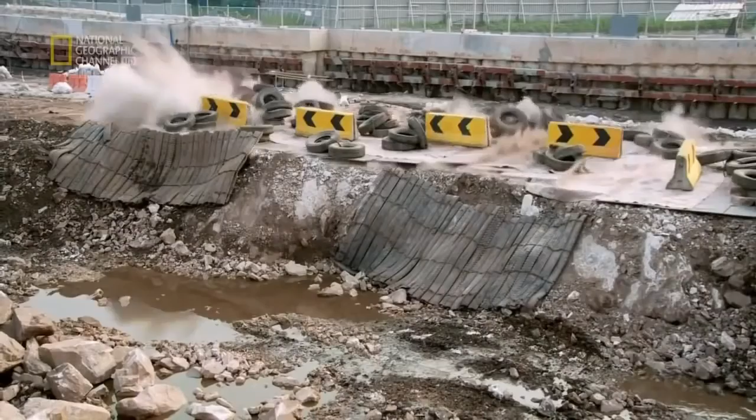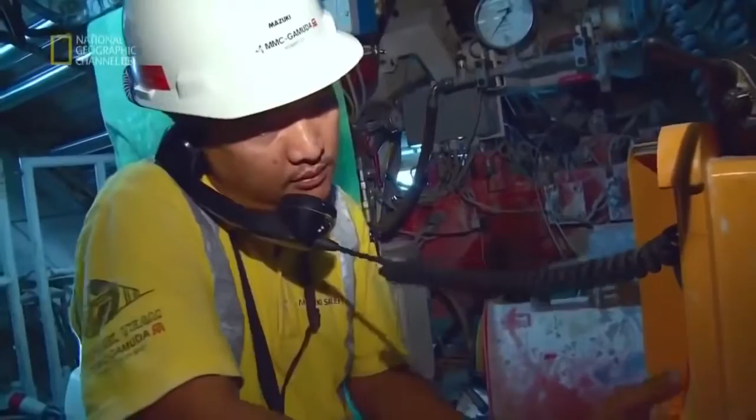Now there's an ambitious solution: a new transit system that will crisscross not only the city, but the entire region of Greater Kuala Lumpur. Huge machines will bore into Kuala Lumpur's treacherous bedrock to carve out almost 10 kilometers of tunnel. Every day of construction, the engineers confront the perils of mechanical failure, fire, and collapse. Get it wrong and billions of dollars of investment could go to waste, and the streets of Kuala Lumpur and its pent-up economy will stay trapped in gridlock.

Kuala Lumpur is one of Asia's most vibrant cities. It's looking to compete with the region's Asian tiger economies. Its magnificent skyline testifies to its soaring ambition. But at street level, it's a different story. The city is blighted by severe congestion that threatens its future growth.

Over 7 million people live and work in the Kuala Lumpur region, the Klang Valley. Every day, they head into town in 4 million cars. As an alternative, a light rail transit system was built. But over time, it has been overwhelmed, and connections are inadequate.

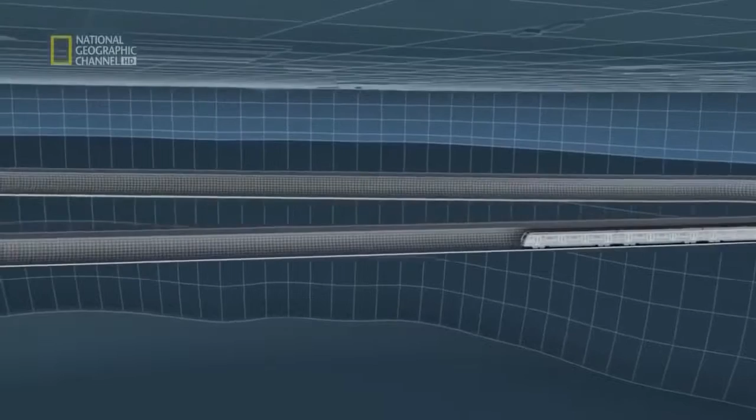Now there's a solution, a new mass rapid transit system that will reduce the pressure on traffic and unite far-flung parts of the city. For any modern metropolis to be vibrant, to be competitive, to be on par with some of the leading cities in the world, you've got to have a modern public transport system.

The Klang Valley Mass Rapid Transit System, the KVMRT, is Kuala Lumpur's bid for greatness. 3 different routes comprising more than 150 kilometers of brand new lines. It will be seamless travel around the Klang Valley, especially the areas of high concentration population.

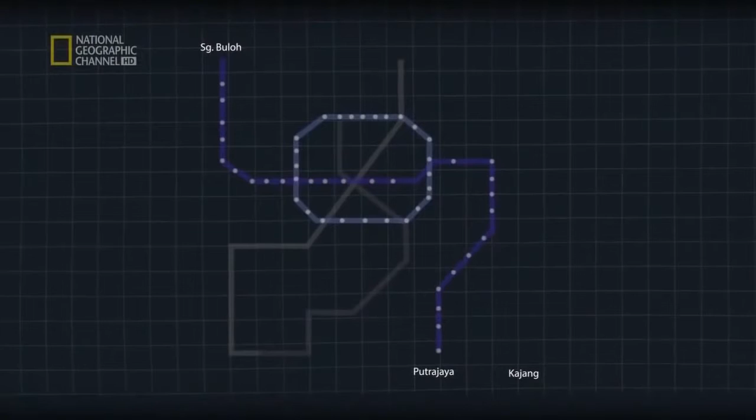And the first stage of the plan is the biggest test of all. This is the Sungai Buloh Kajang line. It will stretch 51 kilometers with 31 new stations. And a fifth of the new line will have to be constructed underground. To do this, 10 giant tunnel boring machines, or TBMs, will be brought to Kuala Lumpur and set to work.

These mighty engines do much more than burrow through rock, astonishing though that process is. As the huge drill crunches forward, the back end constructs the tough tunnel frame with high-strength concrete. In charge of this massive operation is engineering veteran Satpal Bogal. Most cities now, for railway mass transit systems, the tunnels are built using TBMs because of safety issues and because of ground conditions.

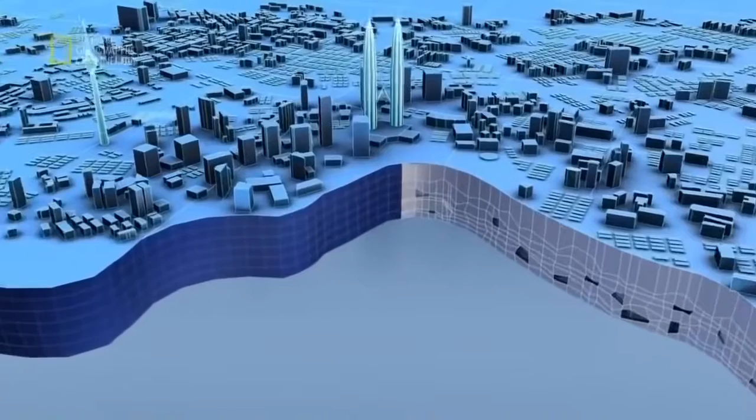The underground section of the new MRT will be a perilous undertaking. For beneath Kuala Lumpur is a formidable engineering challenge. Below the city are 2 very different kinds of rock, and the TBMs will have to deal with both. The western area is known as Kenny Hill, and the eastern areas as the Kuala Lumpur limestone. Imagine the difference between a Dutch Edam and a Swiss cheese riddled with holes.

Dr. Ooi Lean Hock is the project geologist and expert on Kuala Lumpur's underground world. I got this Dutch Edam cheese here. As you can see, this whole piece of cheese is fairly homogeneous, very tight. And Kenny Hill, when it's bedded, it looks something like this. This is like the KL limestone. All right, this is Swiss cheese. As you can see, there are a lot of cavities and voids inside the cheese. These voids can be transmitted all the way to the other side of the cheese. Things can move in from one hole to another hole, and it may come in vertically and go out laterally.

The most formidable challenge lies beneath the eastern areas of Kuala Lumpur, which rest on a huge slab of limestone. Over millions of years, torrents of acidic rainwater have eaten away the layers of rock to sculpt a hidden landscape of pinnacles, cavities, interconnected passageways, and colossal caves.

Around me here on my left is a surface karst or a limestone hill, you can say. Now imagine when we are underground and all these are covered with soil, it is totally a different ball game. So when you tunnel through this kind of material, there are a lot of unforeseen circumstances which would be a nightmare for tunneling.

This is the worst nightmare of all: the drill head hits weak cavities and the rock caves in on the cutter head. The solution is this stuff, slurry. At the head of the drill is a high-pressure chamber that injects a liquid called bentonite slurry into the cavities before they can collapse.

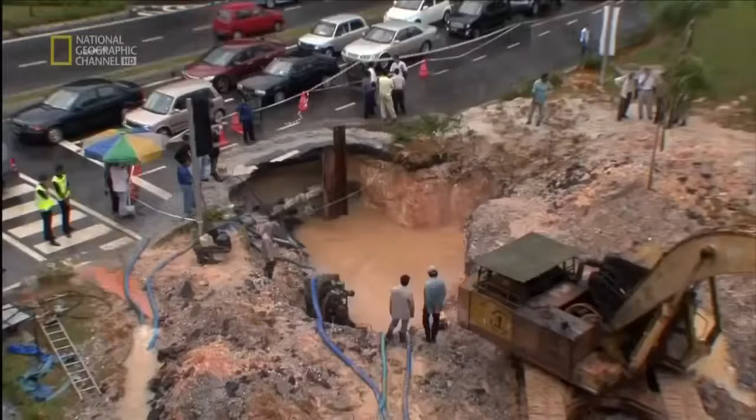This ingenious system was used by the engineers who built the Smart Tunnel in Kuala Lumpur, the world's first combined storm and traffic tunnel. But builders learned some hard lessons about slurry.

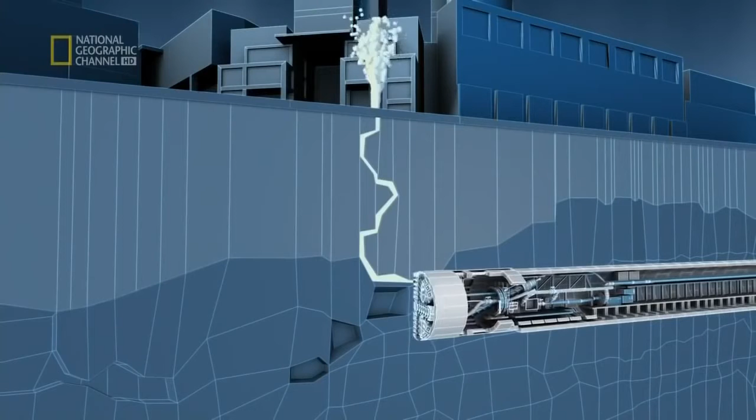Ng Hawei was a rookie engineer on this project. We have the best machines in the world in the SMART project, but we still do have some problems. We just couldn't control the slurry and it easily escapes to the surface, creating sinkholes. What Ng and the engineering team found, to their cost, was that the slurry they injected into the limestone cavities could escape into surrounding rocks and cause havoc, bursting from the ground like a geyser or creating sinkholes at the surface that might suck in people, cars, or buildings.

Today, Ng heads the tunnel team building Kuala Lumpur's MRT system. And this time, he had to find a solution to the uncontrollable slurry problem. Working with German company Herrenknecht, Ng and the team of engineers have come up with a revolutionary kind of machine. We throw in all the ideas, we have brainstorming sessions, we consult a lot of experts, we have to do a lot of research because no machine has been designed like this before.

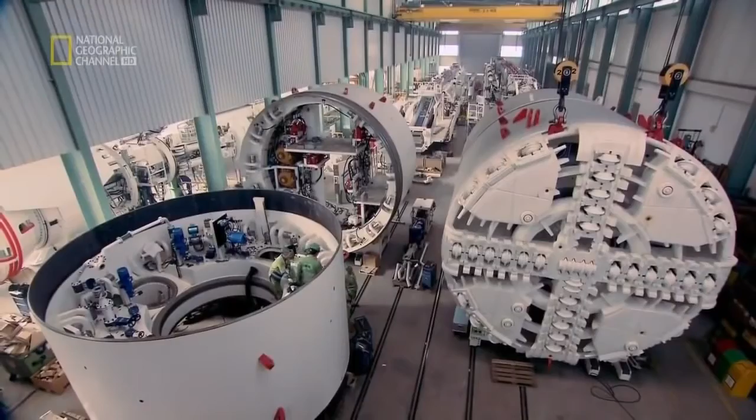From these brainstorming sessions was born this mighty machine. Called the Variable Density Machine, it's the state-of-the-art tunneler. For the first time, a TBM can control the consistency of the slurry and take on whatever Kuala Lumpur's underground throws at it. Even the construction of this revolutionary machine is on an epic scale.

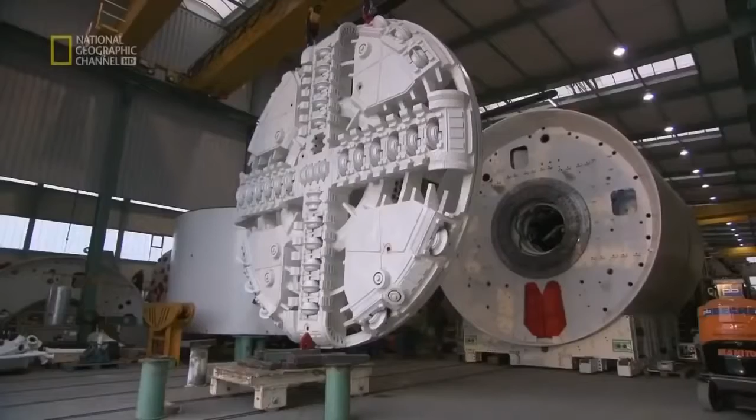Components are brought from all over Europe to be assembled inside the massive factory in Schwanau in Germany and other Herrenknecht plants in China. One machine like this is fiddled together. You can say the machine is fiddled together with about 40,000 pieces one by one.

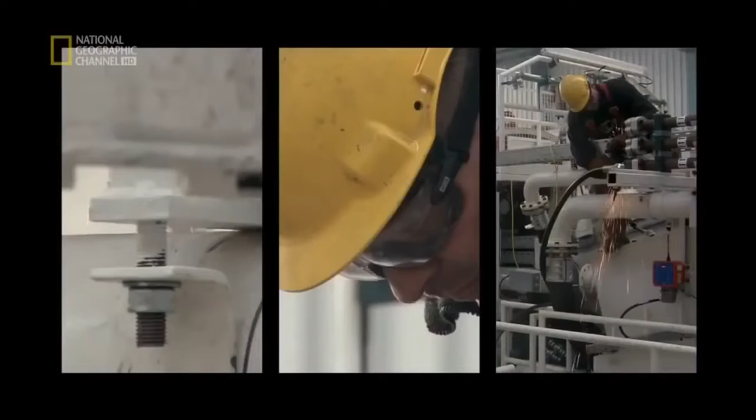The design starts screw by screw, piece by piece, and this is brought together with all our 400 engineers. They do all these works to come to this level, what you can see today. It takes 9 months to manufacture the revolutionary TBM.

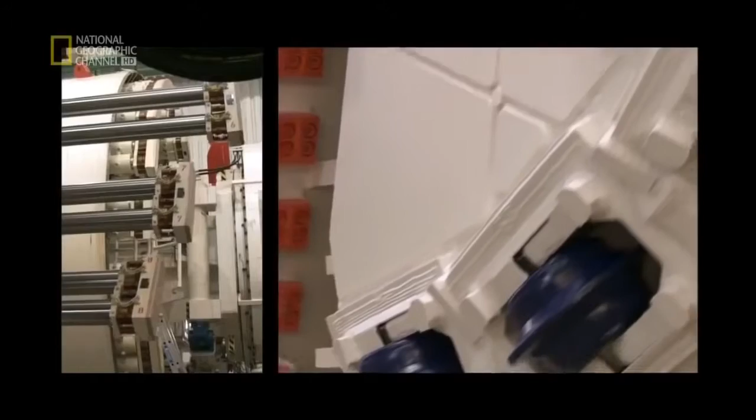Today, it's ready to be put through its paces. We have only seen it on the drawing board so far. So this is the first time that it is all put together. Everything is running, so we can check every equipment, including the cutter heads, the hydraulics, the safety features. This is the last chance for us to make final modifications before we send it to the site and put it in the ground.

As the engineers work on the TBMs in Germany, work gets underway in Kuala Lumpur. The engineering company in charge of tunneling, MMC-Gamuda KVMRT, must complete the job in 24 months and with minimum disruption to the city above.

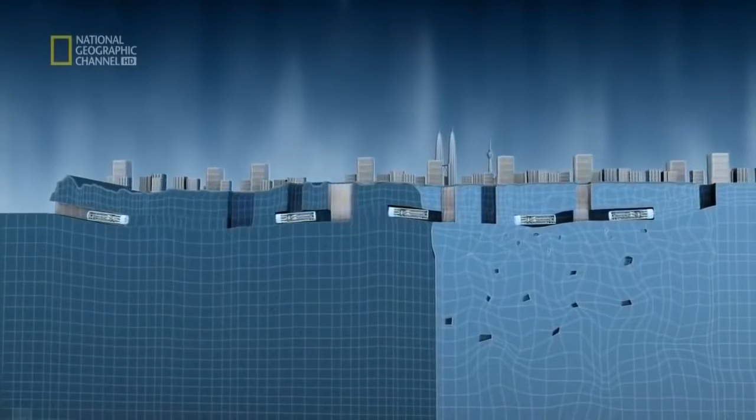The operation is conceived on a military scale and with military precision. The TBMs will be launched from 4 different staging zones along the planned route of the underground section of the MRT. At the western end of the tunnel, the elevated section of the MRT begins its descent underground from the surface. But at the 3 other zones, shafts must be excavated so that the different TBMs can be put to work beneath the city. Eventually, the different sections of the 9.5-kilometer tunnel must all link together.

Since July 2011, work on Kuala Lumpur's new MRT starts here at the Cochrane site. It must be dug out to a depth of 30 meters before 4 TBMs can be deployed. The huge staging zones will be blasted out of the ground.

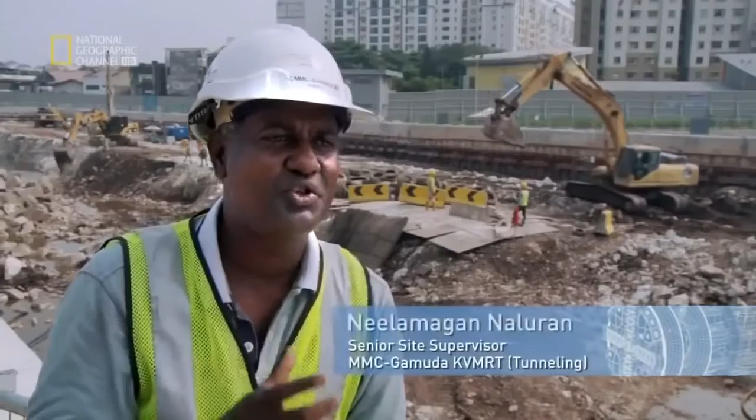We have short time to meet our requirements, so we are working with frequent blasts, more than 2 or 3 blasts a day. The blasting must be carried out with rigorous precision, especially in a city as dense as Kuala Lumpur. So when you talk of blasting itself, it's dangerous. You can see we've been surrounded by high-rise buildings. Now at the moment you're using about 150 to 200 kg. So that can bring a 10-story building down.

The solution is to sequence each blast, creating a pressure wave that, in theory, won't damage surrounding buildings.

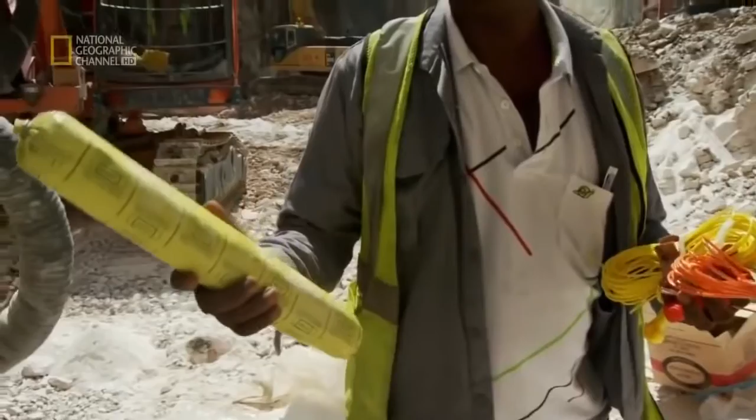These are the basic things we use. In my hand now is explosive, which will be charged to the detonators over here, and it will be connected one at a time, and finally we have relays. This will segregate the blasting rather than at one go.

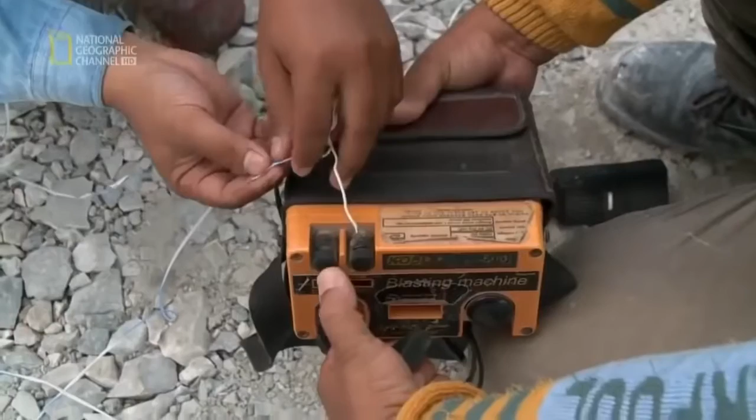Engineers dig rows of holes between 3 to 6 meters deep. Then the explosive charge is inserted inside with a detonator. These are connected to a central command point. But nothing is left to chance. Giant barriers of steel plates, truck tires, and concrete prevent debris flying from the site. The charge is set.

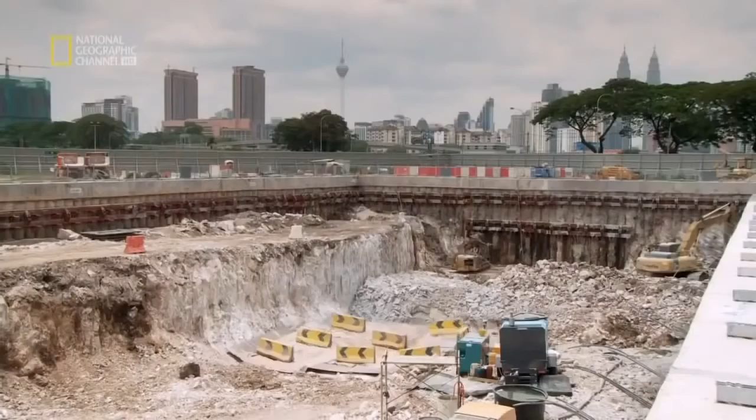The engineers have got the right formula, and the surrounding buildings are safe. The blasting continues at the Cochrane site for 7 explosive months. Enough rock and soil to fill 50 Olympic-sized swimming pools is blown out of the ground. And finally, the site is ready to receive the first TBM.

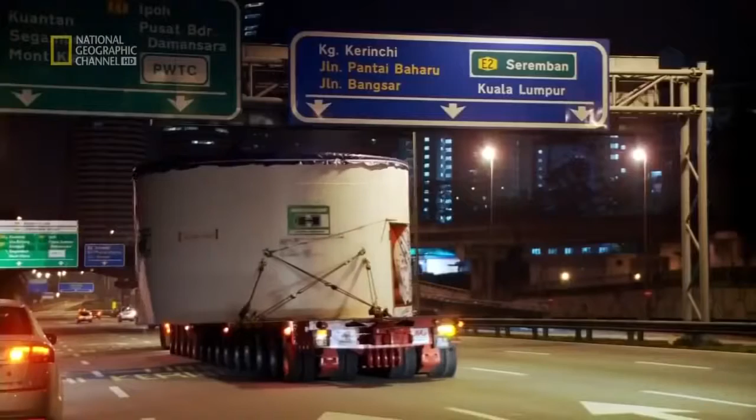Its code name, 774. At the beginning of 2013, the first new model arrives in Kuala Lumpur. The giant machine is transported in parts to the Cochrane site on huge lorries.

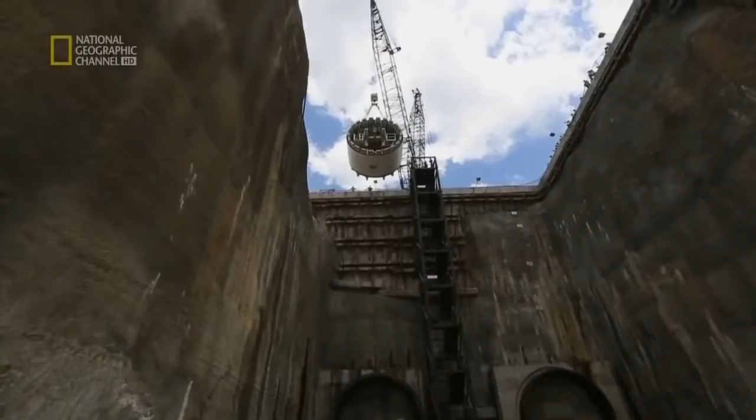But that's the simple part. Now the 160-ton monster must be lowered into the excavated shaft so that they can start chewing into bedrock. To lift it down 30 meters down the shaft, we have to be very careful. Anything can go wrong and then we are stuck. It will push back the whole project completion by a lot.

At the site, everyone is holding their breath as the TBM begins its descent underground.

Malaysia's capital, Kuala Lumpur, is being transformed into a huge building site. A new MRT system is under construction. Close to 10 kilometers will be built beneath the city, and a revolutionary new tunnel boring machine, or TBM, is brought from Germany. The first to be sent into action weighs 160 tons and has to be delicately lowered 30 meters to the tunnel entrance.

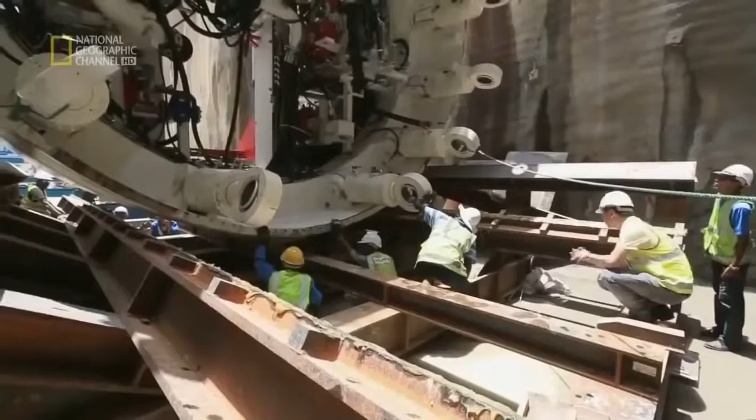The man in charge of the tunnel operation is Ng Hao Wei. He won his spurs building Kuala Lumpur's famous smart tunnel. We are dealing with very delicate components. We cannot afford to damage it. If the extent of damage is huge, then the impact to the project will be tremendous.

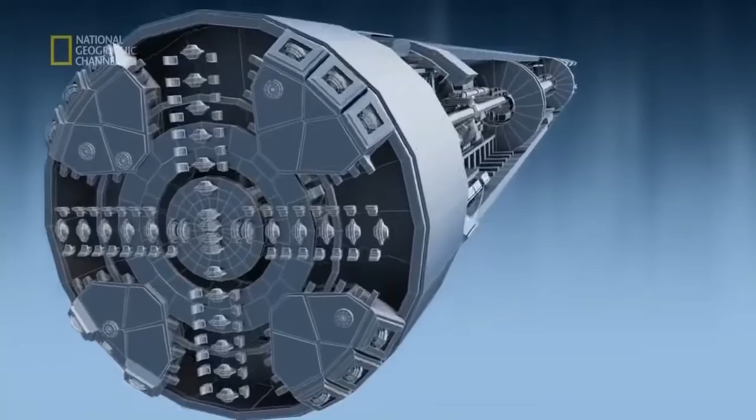This is literally the cutting edge, the business end of the huge machine. The circular cutter head weighs 70 tons with 37 tungsten carbide cutting discs, which are stiffer than steel and denser than titanium. The entire TBM is 135 meters long, almost double the length of a 747 jet airliner.

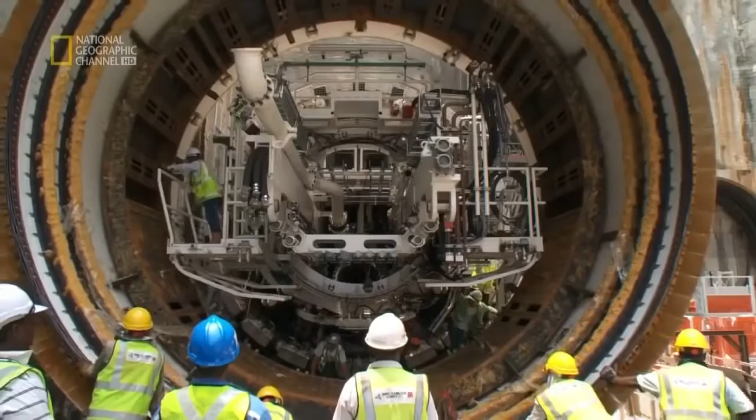Each TBM has 10 interconnected gantries to support the operation. Only 3/4 of the shaft has so far been excavated, so the monster machine has to be assembled in sections. We assemble up to the 6th gantry, which will give us the key components of hydraulics and electrics, so we can start to launch the machine. At the same time, give sufficient space for the shaft excavation to go on. It takes just under 3 months for the TBM to be assembled.

The Prime Minister of Malaysia launches the very first variable density TBM. It's actually a technological marvel. And it goes to show that, in partnership with a German company, Malaysians can offer a lot of our technical guidance and advice. This is something that we can be really proud of.

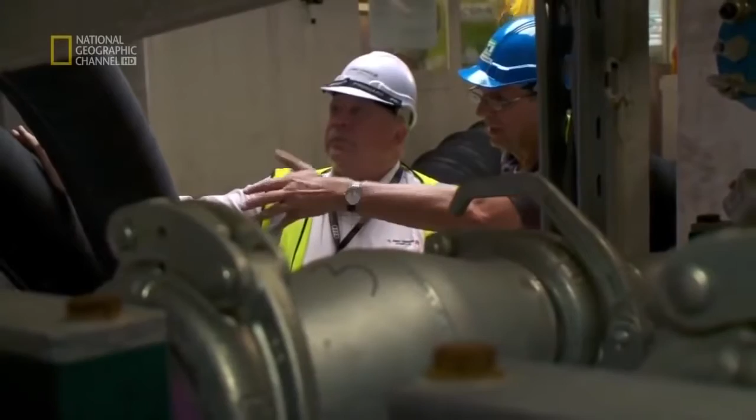One day later, Ng Hao Wei and his mentor Gustav Klados arrive to check on the machine's progress. Gus, a veteran Hungarian tunneler, has worked on some of the biggest tunneling projects in the world, including the Channel Tunnel linking Britain and France, and the Smart Tunnel here in Kuala Lumpur. This tunnel warrior is the team's project manager and is thrilled to be working back in the city on the new machine. It's uncharted territory.

We are trying out something totally new. A lot of people at the beginning said, no, it won't work, but now it is excavating. You can hear the stones moving around in the pipe, so it's a fantastic noise. It's my favorite. Much better than in the office.

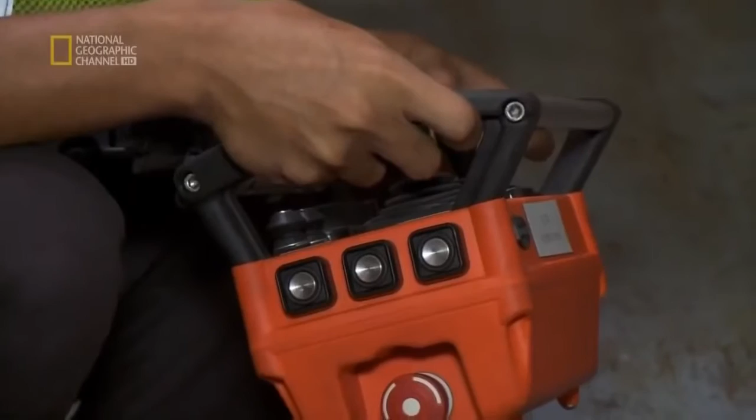It's not just the machines that will need breaking in. The giant TBMs must be served by an army of workers, day and night, week after week, month after month.

I'm new here, but I try to make my best every day. Everybody starts as new. Trust me. Me too, I did start as a new guy. My first job was to go and count the number of nails and bolts and nuts in the stores, and I went there and literally counted them for a week. When I finished, I went to the storekeeper and he told me that we usually use a scale.

The MRT tunneling project will need thousands of workers over the 2-year period of construction, and MMC Gamuda set up an academy to train the hundreds of workers needed to finish the tunnel on time.

Veteran or newcomer, the team faces a daily avalanche of problems, and right now, the problem is pretty basic. The TBM is just not picking up speed. 8 millimeters a minute. Not very fast. Yeah, but it's all right.

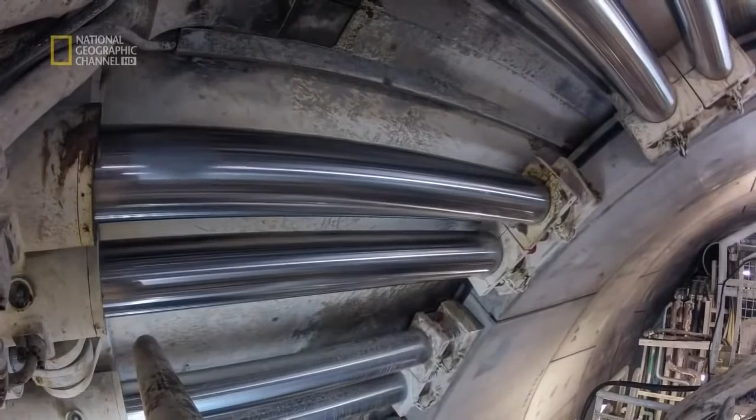At this pace of tunneling, the project will take 4 years longer than expected and run millions of dollars over budget.

But veteran engineer Gus Klados hopes that the giant machine will soon pick up speed. In the next few months, it is just to sort of break in the machine like a horse which has never been ridden before, and I am convinced that we will make it work.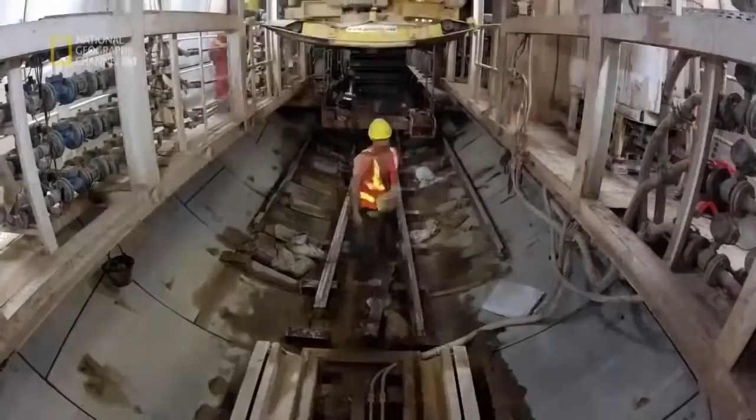The team is under pressure to complete the tunneling works on time. In the tunnels, the TBMs never stop mining, it's a 24-hour operation. And 3 weeks since mining began, the giant machine has at last picked up speed.

The TBM is like a huge underground factory, drilling, building, and spewing out waste. The heart of the entire operation is in this tiny space.

So what's happening? Pressure sensor number 4 has a broken wire. The control cabin is the heart, the control center of the TBM, where everything is controlled.

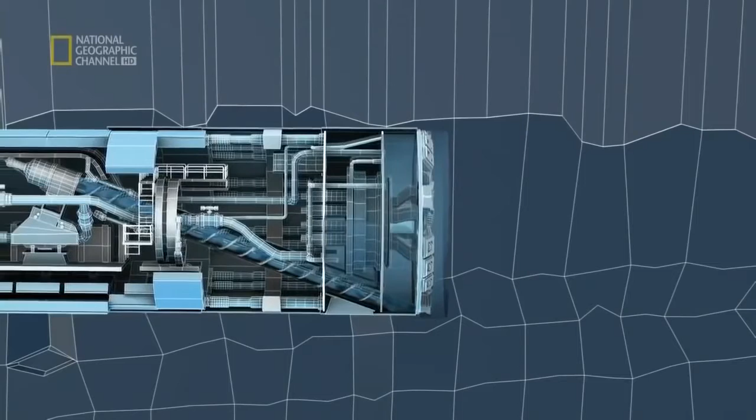If you're building a skyscraper, visibility is not normally a problem, but underground, it's a different story. You can't see through rock. So to give the TBM underground eyes, the machine is equipped with arrays of sophisticated sensors. It's like when you are working in a submarine, you have to depend on the sensors, you have to depend on communications, you have to depend on eyes. Other than yourself, you can't see anything.

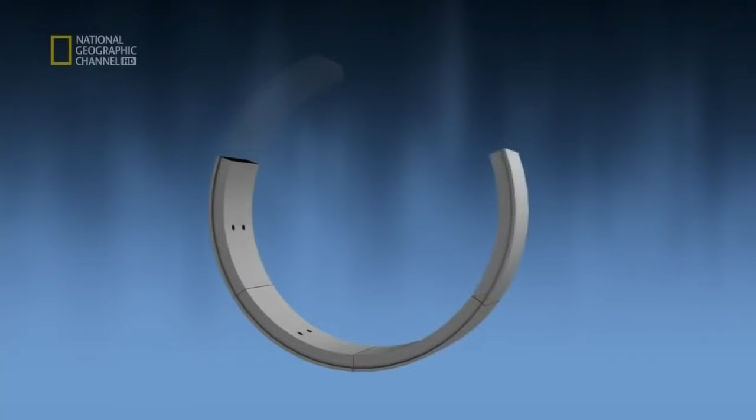Inside the control cabin, engineers can work out with absolute precision the real-time position of the TBM, calculate changes of direction, and when to start lining the tunnel wall. After mining about 1.4 meters, we build the segments piece by piece and build them up like a jigsaw puzzle. These tunnel rings are made from 7 segments plus 1 keystone that holds everything together.

The concrete wall segments can withstand extreme pressure 30 meters underground. All day long, concrete segments arrive at the TBM, each weighing 2.2 metric tons. Giant hydraulic arms swing the segments into place using the TBM's vacuum erector, which uses the power of suction to raise and position each segment.

Precision is essential. If any one of these segments are wrongly positioned, the consequences would be catastrophic. So it's very important to drum into the ring building team that they have to build it to the required tolerance of a few millimeters precision. If we are out of tolerance, water will find its way to seep through and we'll have a great problem to seal it up.

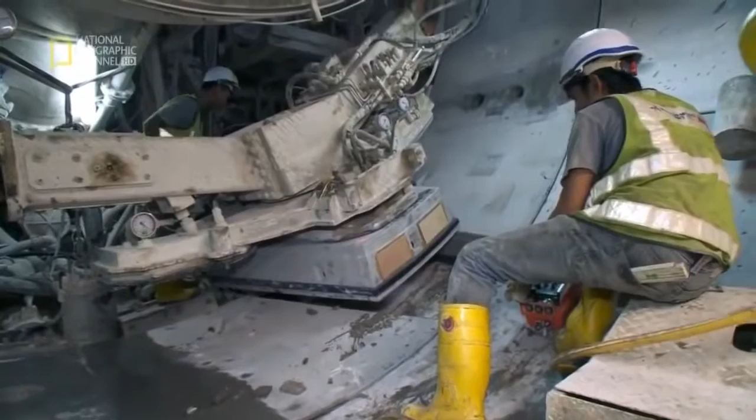Over time, as graduates of the Tunnel Training Academy get more experience, the process builds up momentum. In the first week, the teams managed to place just 3 rings a day. 3 months in, and the rate is 5 times higher.

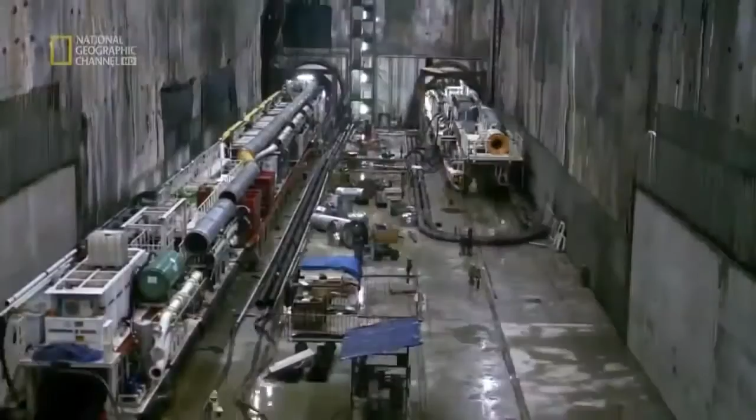The campaign to excavate Kuala Lumpur's new MRT tunnels is about to enter a more intense phase. By November 2013, 4 TBMs have been successfully launched from the Cochrane site. But at another launch site near Inai Road, the engineers have run into difficulties.

Here, 2 circular shafts are being excavated to 30 and 45 meters in depth. But as the shafts are blasted out of the ground, disaster strikes.

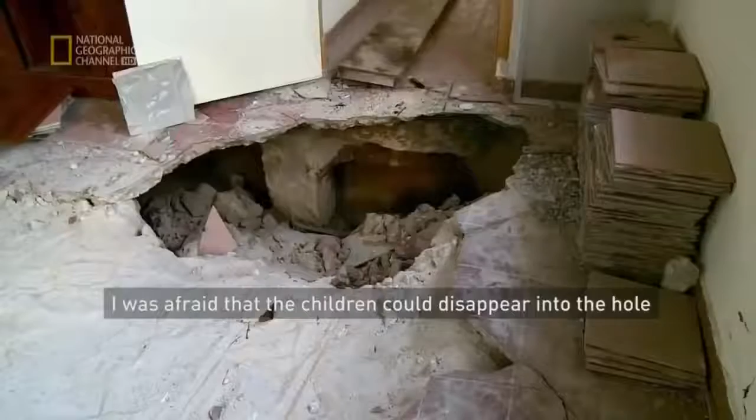In the heart of Kuala Lumpur, the new MRT project has hit a snag, a hole-shaped snag.

Mr. Jamaluddin lives 50 meters from the launch site on Inai Road, where 2 shafts are being blown out of the rock.

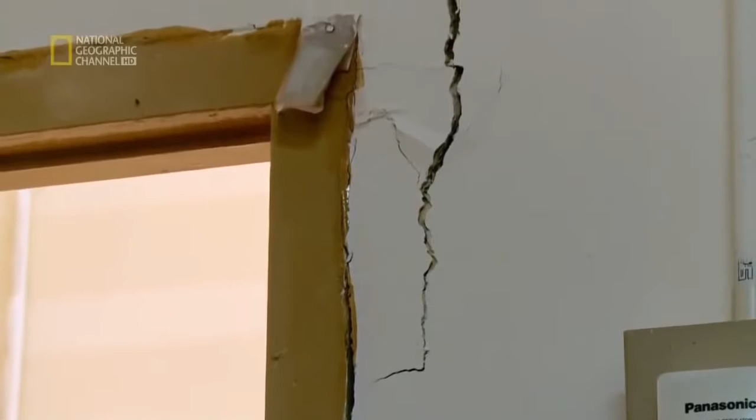Terrified, Mr. Jamal calls the company in charge of the MRT project. When inspectors see the condition of his home, they make an immediate decision to move the family out. Engineers now need to explain what has gone wrong and whether other homes are at risk.

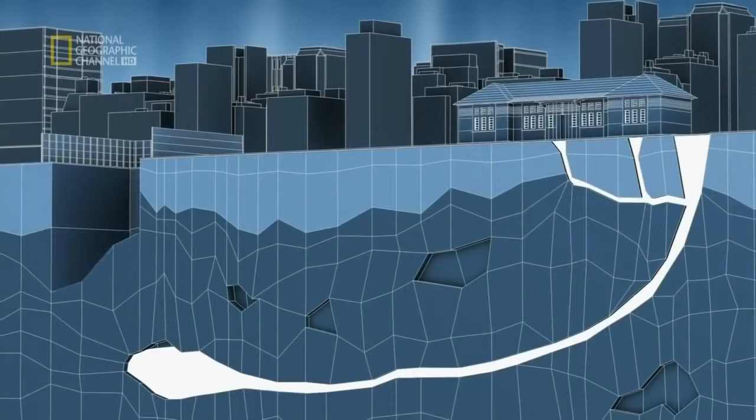In limestone, what happened is that the solution features can be connected laterally and vertically. What happened is we drill a shaft, and this hits a connection. When there's a hole, it's like a pipe culvert. If you have a culvert connecting from the shaft to underneath Mr. Jamal's house, that forms a very easy flow passage of water, bringing the soil from underneath Jamal's house into the shaft. And that results in sinkholes.

And it's not only Mr. Jamal's house that's in danger. Water is pouring in from the walls in the deeper of the 2 Inai shafts.

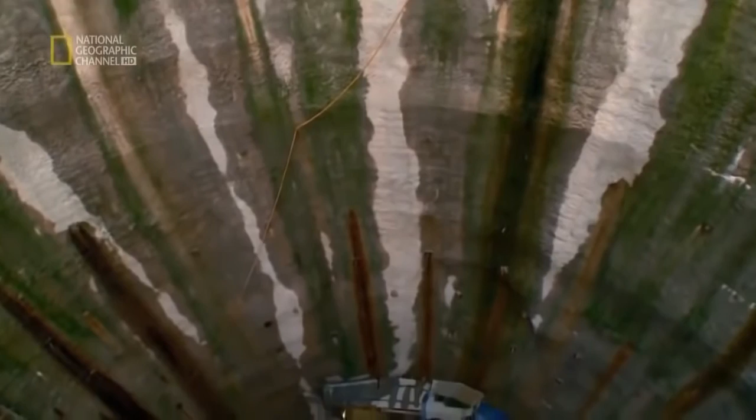It's unstoppable, and the situation is a tough call for project director Satpal Bogal. We couldn't stem it, and the decision was taken to backfill it for safety. That decision then followed on to other changes to the program.

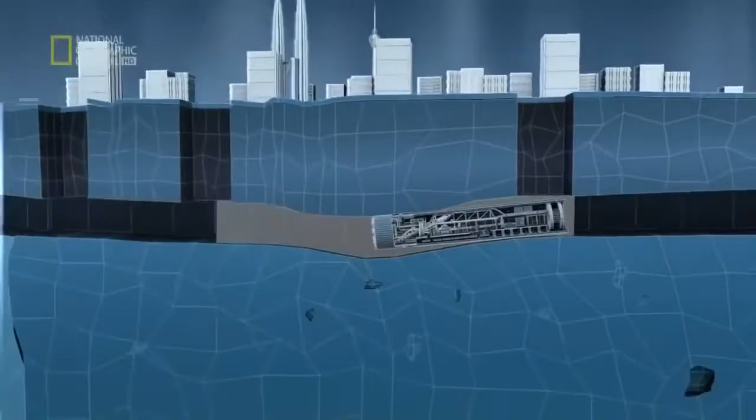Abandoning one of the two Inai shafts is a huge setback. Now only one TBM can be launched from here, meaning a new strategy has to be devised. The first TBM brought to Malaysia, 774, which has been mining from the Cochrane site, must now make up the difference and tunnel more than twice the distance. It will put the complex machine under severe strain.

It's not only flooding that makes the Inai launch site such a headache for the engineers, it's also a very tight fit compared to the other launch sites. Tunnel engineer Aslan Marzuki is in charge of getting the huge TBM to the bottom of the shaft. It's a smaller shaft, not a square, it's a circle. That saves space, but it means our launching is going to be staggered.

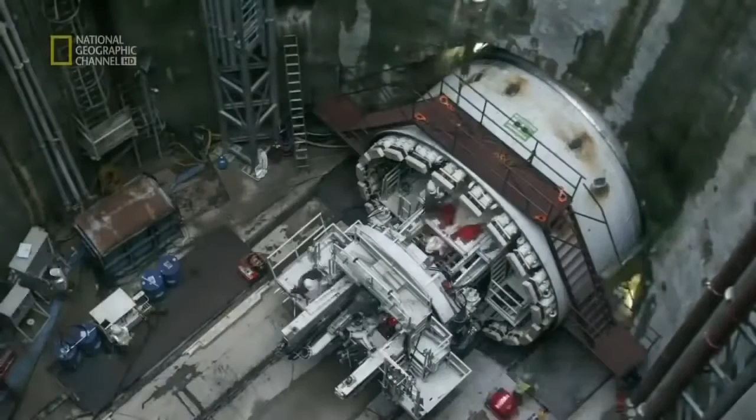The team will blast out tunnels on both sides of the shaft. Then the front section of the TBM is inserted. Next, three out of the ten gantries will be lowered one by one, followed by the giant screw. The problem is that the 18-meter screw segment is wider than the width of the shaft. This is our biggest component that's going to be lowered down. It's the most difficult one because this length is actually bigger than the shaft itself.

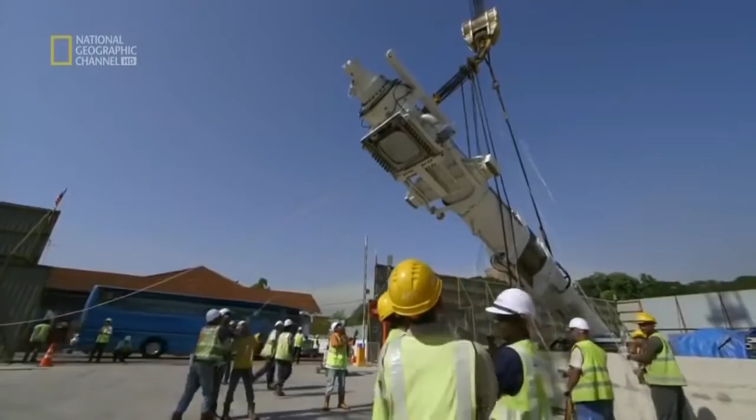The solution is simple, but risky. The screw segment of the TBM will have to be lowered into the shaft at an angle. We have to tilt the screw conveyor at a 56 degree angle. You have to use a chain block, a hand winch, to pull the machine upwards. It sounds simple, but that giant screw weighs a whopping 15 tons, and any deviation from that critical angle would be catastrophic.

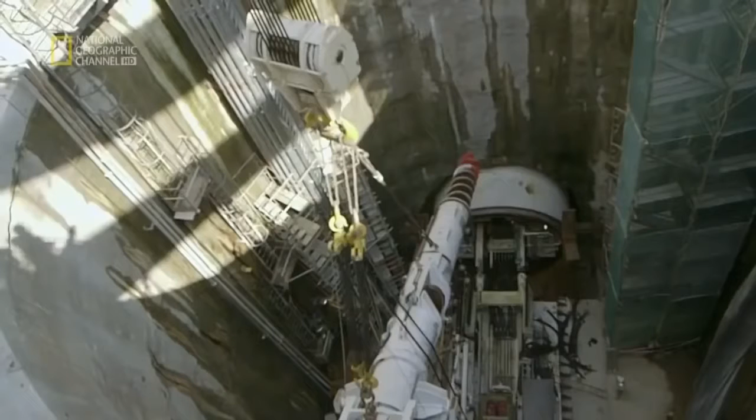At the bottom of the shaft, the engineers face another challenge. The angle of descent has to be lowered. It's another fiddly maneuver with a lot of complicated machinery at stake. When you lower it down, the final angle is 15 degrees. Down there, you still have to do the same exercise again, but it has to be a slow process. After two hours, the screw conveyor is finally in place.

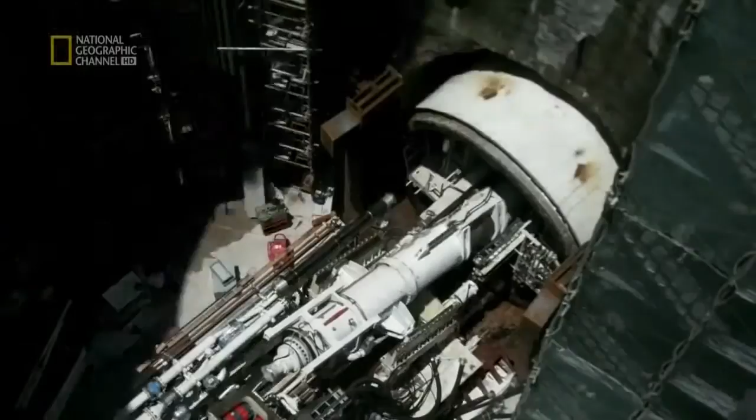It takes three months of hard slog to put the TBM together, but at last it can begin burrowing into the limestone. This underworld is packed with hidden dangers. Like Swiss cheese, the rock is riddled with cavities that could wreck the multi-million-dollar boring machine.

When you're tunneling this way and you have a cave directly underneath your cutter, and it's big enough that you cannot develop face support, the thing just dips inside. In that situation, then we are snookered. It will take us months to recover or to bring that TBM cutter face back into operation.

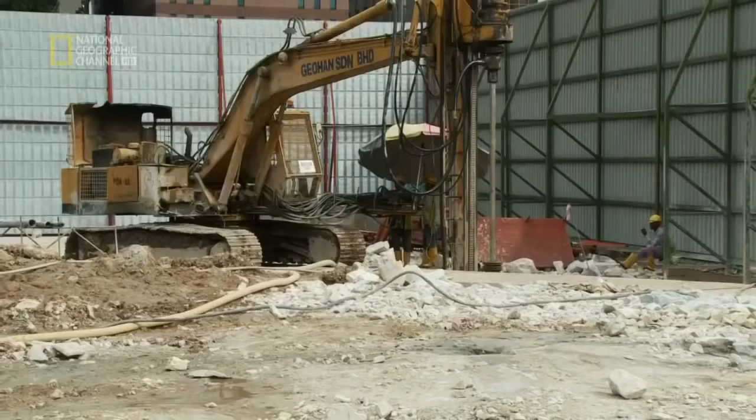As the huge drill edges forward at 14 meters a day, an army of engineers is busy scouting the perils that lie ahead. They drill hundreds of boreholes into the layers of rock. Once a cavity is detected, concrete is poured into the hole to shore it up. It's a process called grouting.

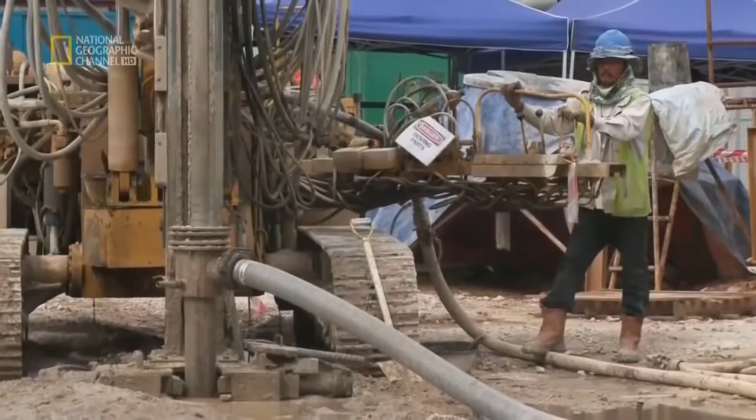If we do encounter such a thing, then we'll do a lot of compaction grouting to fill up this void, like you go to a dentist to fill up your cavity, to ensure that when we are tunneling through, the TBM can go through safely.

But some cavities can be less than a meter wide. These are much harder to fill, but still pose a threat. There's no way we can pick it up. We are unable to treat all these features along our tunnel alignment. So what we then need is a machine that can cater for all these little challenges.

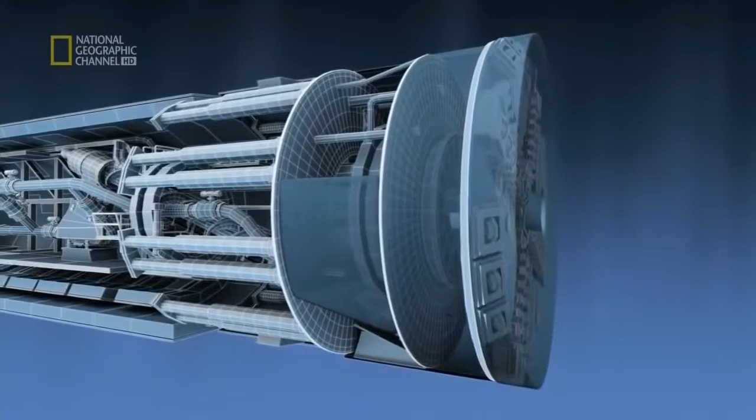Enter the new breed of tunnel boring machines. Behind the drill, a sealed high-pressure chamber is pumped full of liquid called bentonite slurry. Unlike previous models, the new TBMs can control the density of this thick gray liquid, changing the consistency from a thin watery liquid to a thicker honey-like substance. The thicker slurry is used to fill these hidden cavities, and its density prevents it escaping through the porous rock to the surface.

The machine is able to operate at different modes at the flip of a button or some switches. So when we have major loss of slurry, we can switch to a thicker density, kind of a paste that chokes up the flow, and then we can mine through very easily. The revolutionary new tunneling system soon proves to be a success.

But there is a problem that all tunnel engineers fear at the back of their minds: fire, every tunneler's nightmare. For engineers excavating Kuala Lumpur's new MRT system, the most terrifying scenario is a fire in the tunnel. A blaze can suck oxygen from the air in seconds. Workers can suffocate with terrifying speed, and the tunnel itself works like an oven, insulating the environment and ramping up temperatures to deadly levels.

Tunnel workers must be ready to react at any moment, and training exercises are made as real as possible. Christopher Fenton, head of safety, health, and environment for the underground, is training the company's emergency rescue team. Tunnels are very dangerous during construction. Fire is the last thing we want, and we need to be able to respond to it very quickly if it did happen.

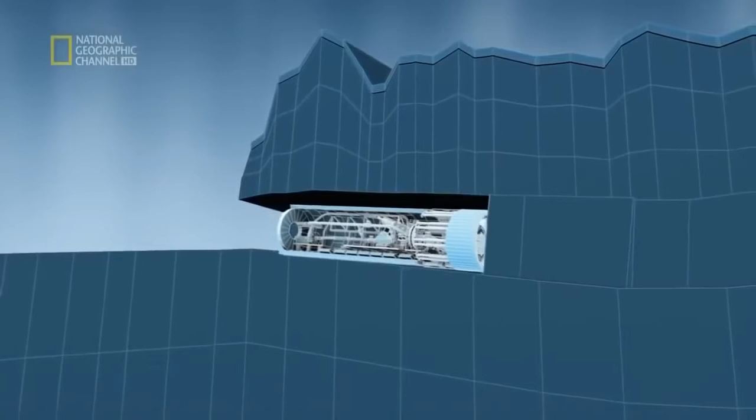Christmas Eve 2013, and the MRT engineers have cause to celebrate. One section of the tunnel, where the MRT line dives underground at Semantan to the Museum Negara station, has been completed. It's the project's first breakthrough, and at any moment the TBM drill head will emerge from this tunnel.

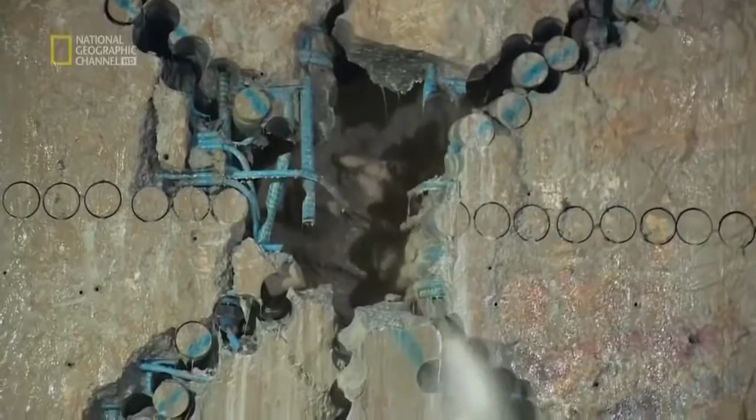It's an anxious wait for tunnel manager Chin Raymond. I told him if it doesn't come in the middle, it has to jump off a cliff somewhere. After drilling for 6 months, the TBM punches through right on target.

Congratulations. Thank you. Well done, man. Okay. Good. Yes, great. Finally, I pushed my machine, it came in. I've been working for more than 24 hours. I can have a good rest to enjoy my Christmas.

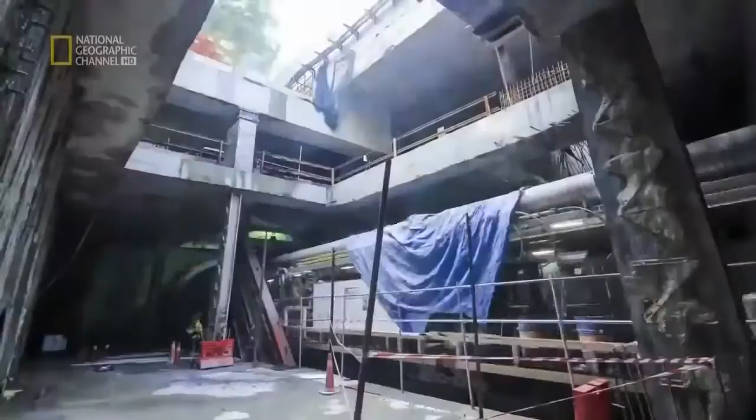But the machines don't get a holiday. As soon as the TBM completes its breakthrough, it is hauled into position to begin work on the tunnel that will link Museum Negara to the next station. The TBM is now burrowing beneath the historical heart of Kuala Lumpur.

The Museum Negara is a repository of the nation's history and culture. Its facade is lined with precious mosaics. Further along the path of the excavation is the old railway station, an icon of the past that stood the test of time. But can it withstand the mighty TBM as it threads its way nearby?

We were stuck with having to cross under some sensitive structures, and the ground settlement would affect the existing structures. If there's too much ground settlement, the buildings could collapse.

For the old building, we had to pay much more extra care because we don't know how good the structure is, or how good the building's foundation is. So we had to pay extra precaution on that.

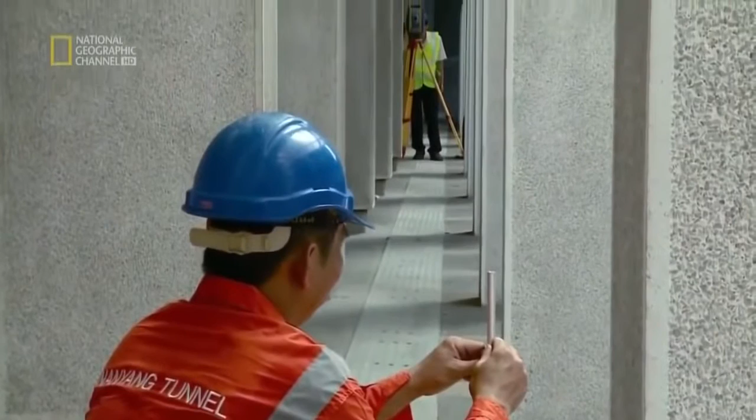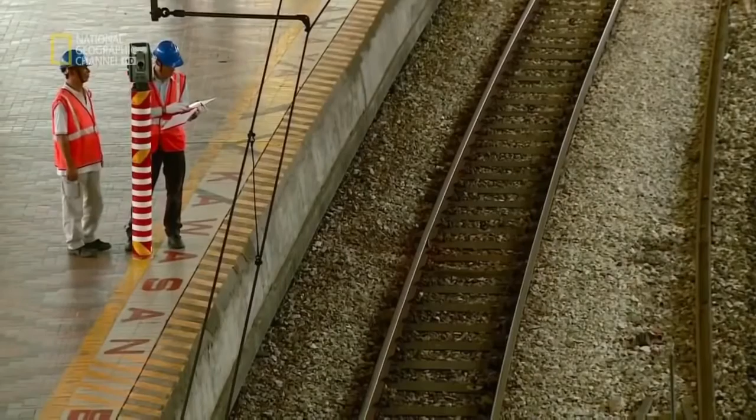A team of surveyors now equip these venerable buildings with highly sensitive sensors that monitor every vibration. As the TBM approaches, Tay Chi Yong and his team of surveyors nervously carry out hourly tests to monitor the old buildings. The TBM is directly below this building. We get to monitor the effects and impact of our TBM drive on the structures above, on the surface above. It's a nail-biting 5 months of constant monitoring as the TBMs negotiate this historic region. And at last, the TBMs inch past. The iconic buildings are safe.

The most powerful man in the world is coming to Kuala Lumpur. All eyes are on Malaysia. But less than 400 meters from Barack Obama's hotel, TBM 774 has come to a standstill. I think we have a problem. The tunnel coming... And right above the stalled TBM, ominous signs ripple across the road, less than a kilometer from the presidential residence.

While the people of Kuala Lumpur get used to living and working in a massive work site, where giant boring machines gnaw away at the city's bedrock to build a new MRT, the President of the United States will be descending on Malaysia in 3 days' time.

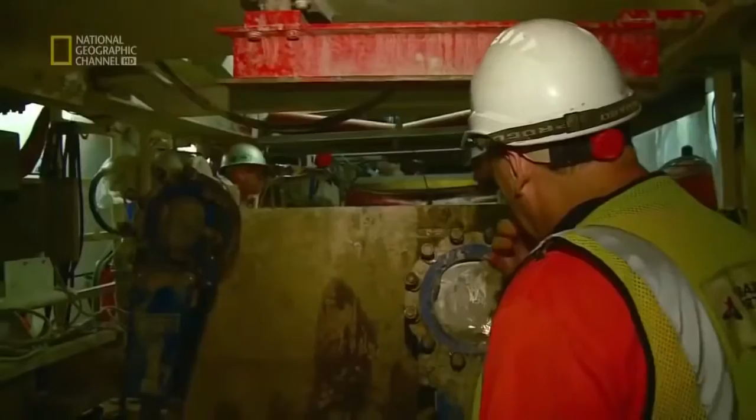But all is not well with TBM 774. Located less than 400 meters from Obama's planned accommodation, the TBM gets a bad case of indigestion and is unable to process the waste from the cutter head. It has come to a halt.

Directly above the TBM, a team is tasked with monitoring road surfaces to look for any signs of trouble. Called the Bull Gang, it is led by Michael Poon. We have a team of people patrolling 24 hours. We have to check on the surface. This morning I walked by, I saw some settlement. It's just a small depression. I can see the hole.

It's quite deep. At the surface, the cracks don't seem to pose much of a threat, but like icebergs, most of the danger is hidden. Down there is a void big enough to fit an electric car. We have an unscheduled stop. They have to lower all the slurry. That means the face support is affected, and that causes a depression or a sinkhole in front of the cutter face.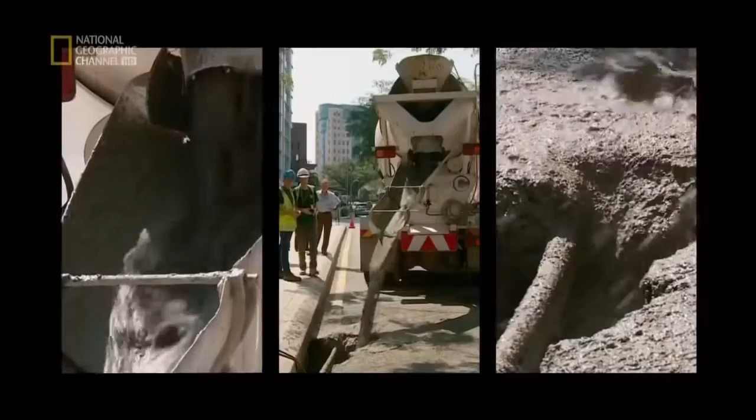An emergency response team reacts immediately. The road is closed to traffic. Then we decide to order mortar to fill up the hole. The hole is quickly filled with 5 cement trucks of concrete, and frantic repair works continue inside TBM 774.

Across town, there is reason to celebrate. The 5th breakthrough of the project will take place today. It's a landmark moment. It means that 50% of the tunnel has been completed.

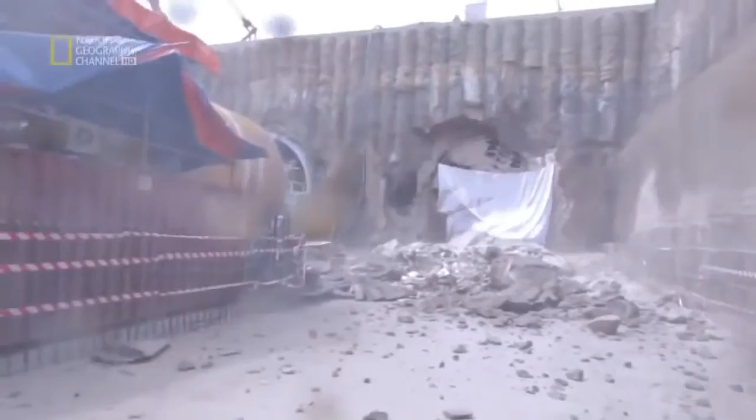Every breakthrough is like a landing on a plane, right? Once you're there, you feel great because you brought home the TBM. The breakthrough, I thought it was very exciting. Now we finished everything, it's very, very good. I'm very content with the progress as well. The quality of the tunnel linings, the precast concrete inside, is one of the best. We work as a team, night and day, blood and sweat, hard time, good time. This is the prize for all the crew. This is like a present.

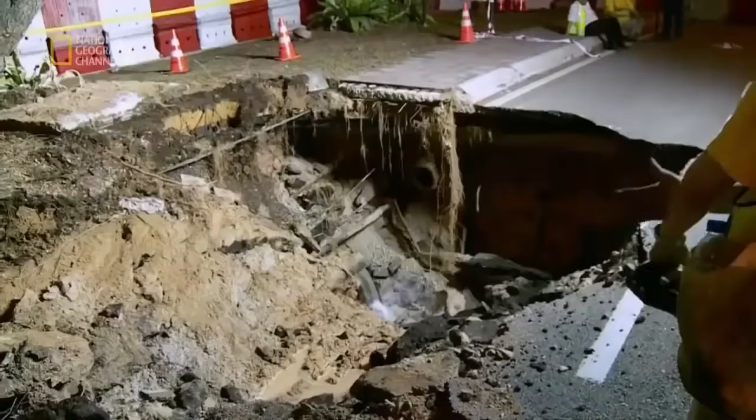But the celebrations are short-lived. As TBM 774 finally starts mining again, President Obama arrives in Kuala Lumpur. But to the horror of the team, another collapse occurs just meters away from the earlier sinkhole as the president is at the official state dinner. This new sinkhole is an even bigger problem than the previous one. Ground movement has broken water pipes, and the hole is filled with live power cables.

President Obama is living nearby. We definitely do not want to cut off water and power to where Mr. Obama is living, obviously, so we're trying to get this done in the quickest time possible. Racing against time, the Bull Gang takes 5 hours to repair water pipes and fill the hole. As they work into the night, President Obama and his entourage are blissfully unaware of the battle being fought less than 400 meters from their hotel.

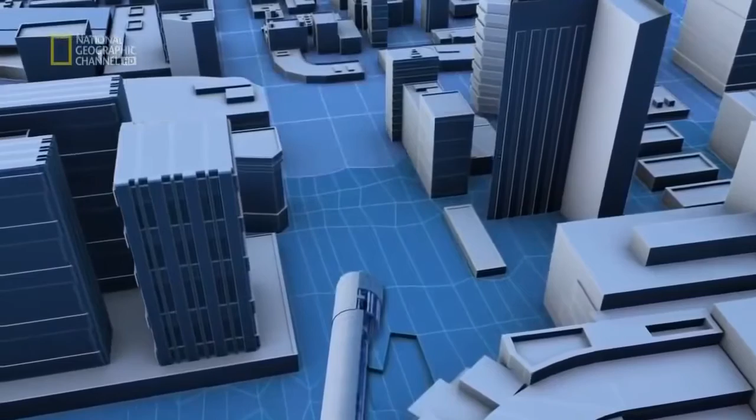TBM 774 is now approaching the zone where the underground geology changes from karstic limestone to the Kenny Hill Formation, from Swiss cheese to Edam. We are going through a very distinct change in ground conditions. In normal cases, you would need to use 2 different types of machines, and you would need another launch shaft to do this. It will take months. But the new variable density TBMs can be retooled underground.

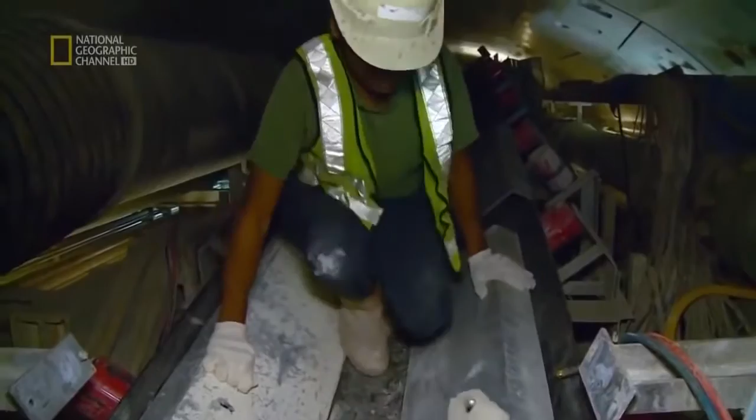It's a matter of changing the way waste is extracted. Instead of extracting through pipes, it needs to be removed with a system of conveyor belts right to the end of the gantries onto these so-called muck cars. The conversion takes 1 week to complete, but it's a much smoother process than the older system.

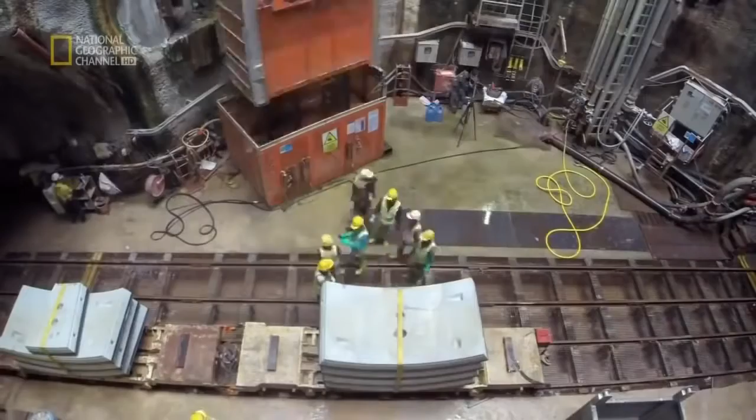But a much bigger hurdle awaits the TBM 774: an underground tangle of steel wires that could bring the TBM to a standstill. 30 meters beneath Kuala Lumpur's nightlife hotspot, Bukit Bintang, engineers excavating the underground section of the city's new MRT encounter an unexpected obstacle.

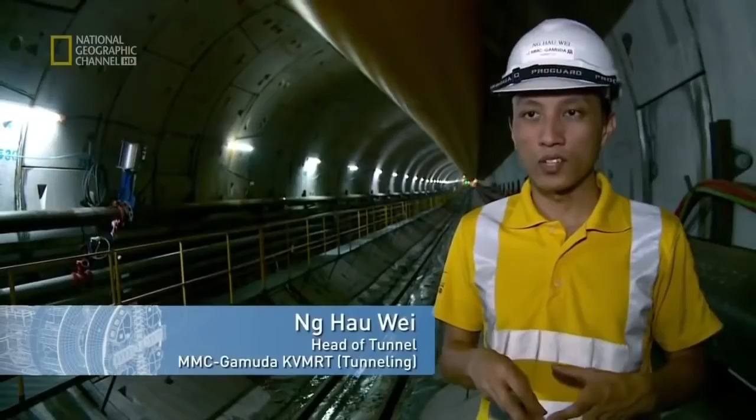Contractors of a shopping mall adjoining the street have left steel wires known as ground anchors in place, and these are bang in the path of the TBM. Put into the ground as temporary supports for the basements, they could hold up work for months. It's very difficult to find them from the surface, and you cannot remove them from the basement anymore because the permanent walls are built. They are all covered.

Since the steel wires cannot be extracted, a decision is made to push on through with the TBM, but there is a continuous risk that the drill head may become entangled and damaged in the wires. It is the task of engineer Ng Hau Wei to monitor the tunnel ahead. So in the morning, actually, we found some ground anchors dropped underneath the conveyor belt, and we decided to stop the TBM, look for the ground anchors, cut it and remove it.

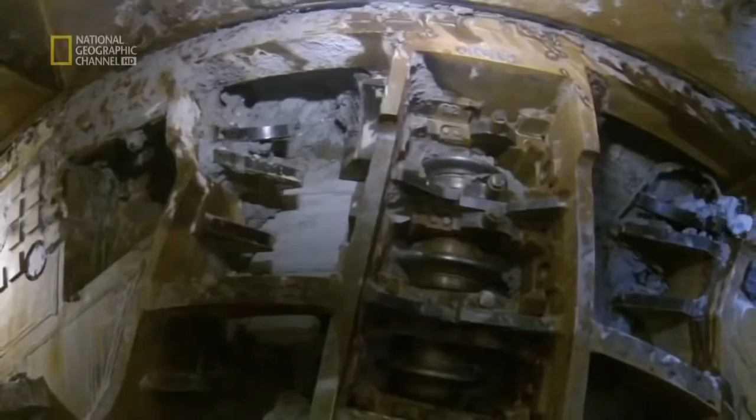A team now has to enter the space around the cutter head at the front of the TBM. There's little space to maneuver, and temperatures are close to 40 degrees Celsius. To overcome this tangle, first the team washes away earth from the cutter, exposing the snarl of steel wires caught in the cutter head. These must be cut away with an oxyacetylene torch. It's a laborious process.

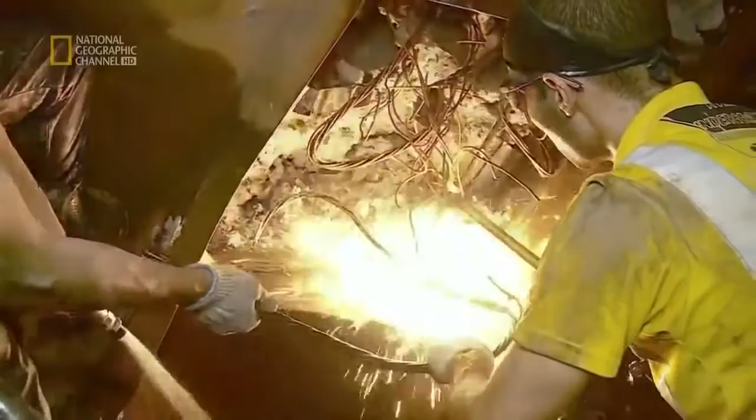Every time they hit the ground anchors, the TBM halts as the wires are trimmed away. It takes 2 weeks to mine through this web, but it could have been worse. If we had hit all the ground anchors that we expected, it would have delayed the project by about 3 to 4 months. And we were able to go down and cut these ropes so that they weren't stopping the cutter head from turning, and we carried on.

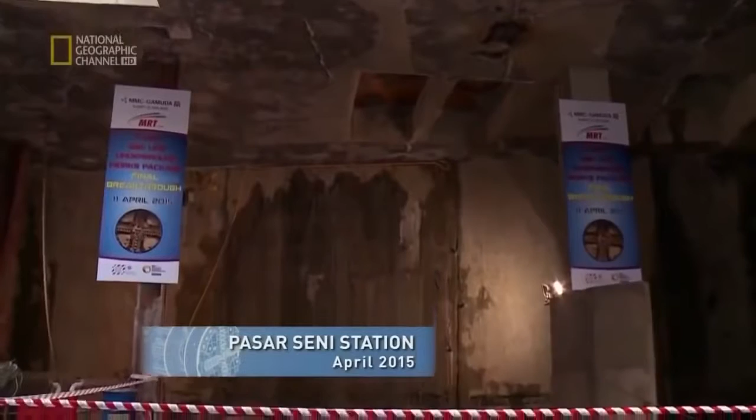It's the final breakthrough. After 23 months of excavation, from tomorrow the TBM will fall silent. The honor goes to TBM 774. This was the first TBM to be launched into the limestone labyrinth under Kuala Lumpur. It has burrowed its way through almost 5 torturous kilometers of rock and soil. Now it must make the final breakthrough.

It's a thrilling day for the engineers inside the giant machine. We are about to break through. We have about 400 mm left on the cut. Hopefully we'll get a successful breakthrough. What's happening now is we're cutting the D-wall, so that's basically the barrier between us and open air. So this is a very exciting moment for us. Any moment now, maybe within the next half an hour, we'll be out to the station.

This is actually the first TBM that we launched back in 2013. Less than 2 years, just short of 2 years, we have done 20 kilometers of tunneling. This is a great day for me and for the whole team.

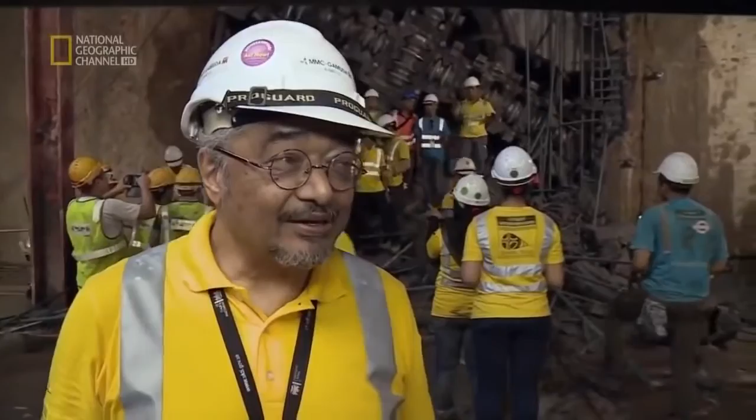This is the completion of our actual tunnel mining, which is probably the highest risk on the project. Smart had over 50 sinkholes in its similar sort of length of drive, and on this project we've had only about 3. We used a variable density machine effectively, and that has proven to be a success. Just weeks ago, MMC Gamuda won the Technical Innovation of the Year award for the variable density TBM in the United Kingdom. It's the biggest development in TBM technology in the last 25-30 years.

So we have witnessed something new in this business. These are the most versatile machines existent in the moment. This is the future.

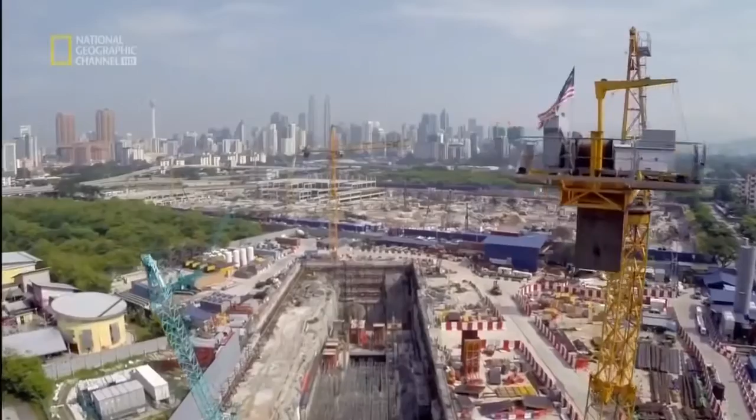The last breakthrough is a landmark moment. Now the race is on to complete the stations and get the MRT running. Only then can Kuala Lumpur's clogged up traffic arteries become truly open for business. You're basically going to live in a modern metropolis of the 21st century. This is the new world that the people of Greater Kuala Lumpur can look forward to: a city seamlessly integrated by overground and underground MRT lines, linking together the city's heart and its far-flung suburbs, where today's gridlock is a distant memory.